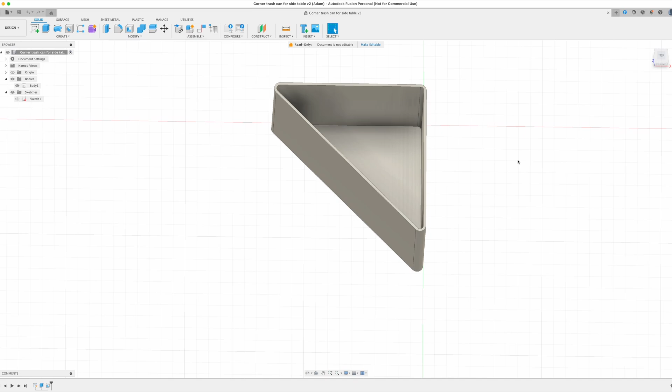Here I am in Fusion 360, and here's the design. It's just a triangle, a right triangle with rounded corners, shelled out.

Let's take a look at the sketch. Okay, so I drew a line 135, 135, connected them, and then I rounded them off with a radius of 5.

In OpenSCAD, it's going to be a little different, because as far as I know, there's not a super easy way to round it off. So I'm actually going to use cylinders.

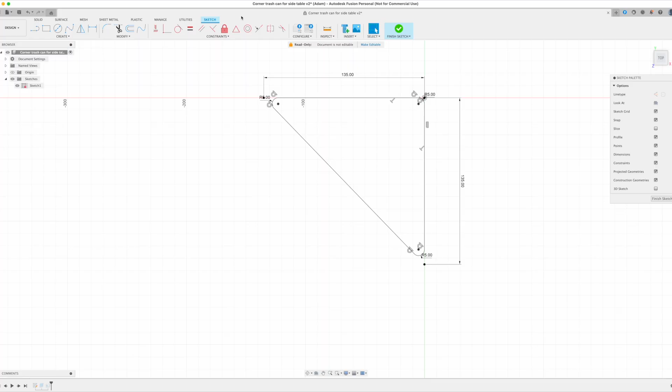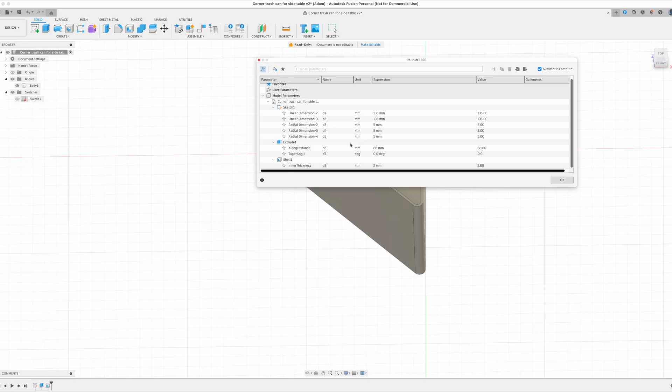Let's see, how tall did I make this thing? I can find out how tall I extruded this. I could measure it, from here to here, 88. Another way is to change parameters and look at this extrusion, AlongDistance, 88.

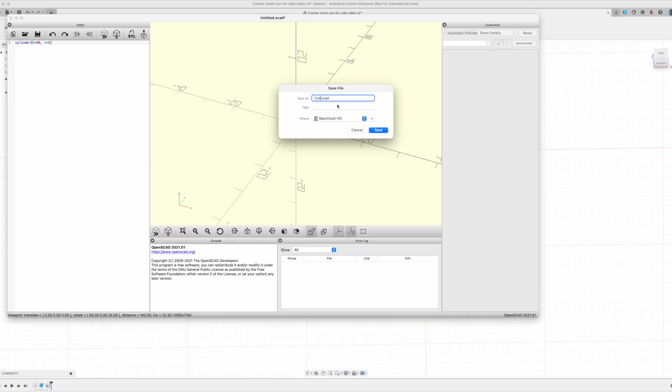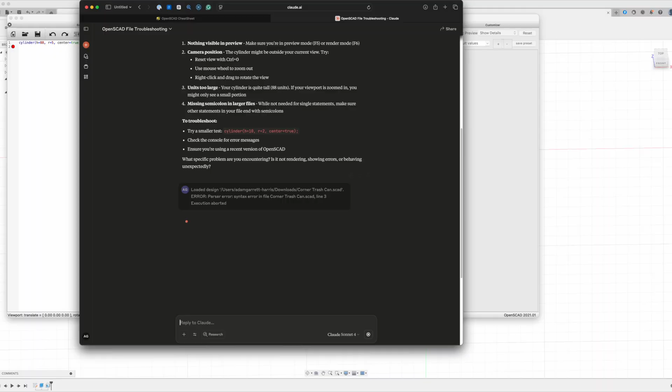So the height will be 88, and let's do H. The radius will be 5. Let's see what I did wrong here. Okay, I finally figured out - you have to have a semicolon.

Okay, so what I'm going to do is make 3 cylinders like this and translate them. This one has a radius of 5 from the center, so it's 5 over and 5 over. So go back here. First one will be 5x, 5y, 0z.

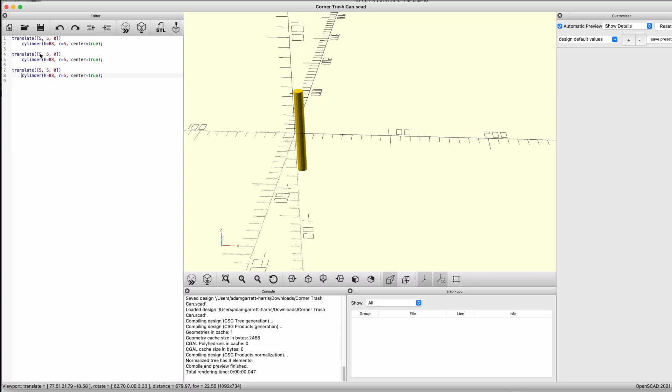The second one is 135 over minus 5, so 130. And the other one is the same thing in the other direction, so 5 and then 130.

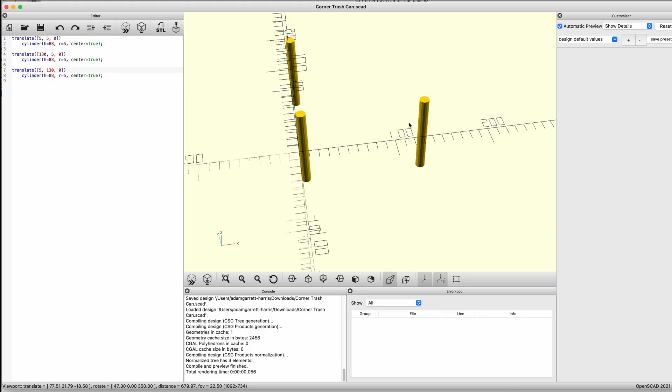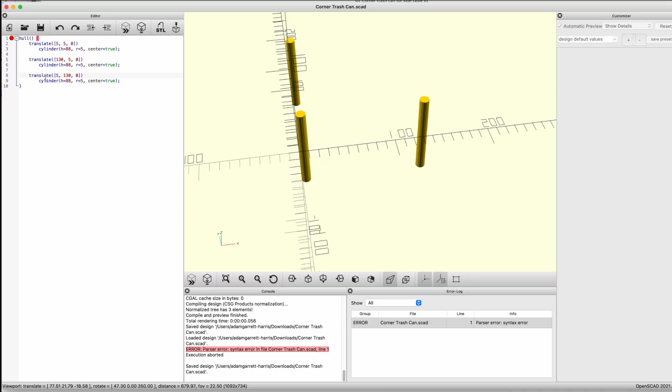So these are the rounded corners. And then if I tell it to do a hull, give it opening curly brace, closing curly brace - I think I need parentheses. There. There's the outer shell.

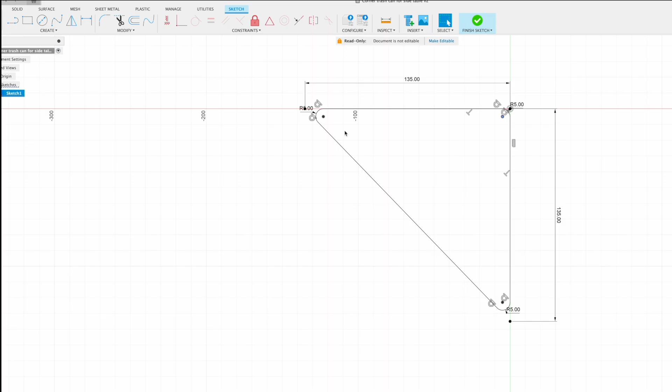Now what I need to do is this whole thing, but with a smaller radius. So let's find out what this distance is here. I can measure from there to there. Okay, that's not right. I can measure from here to here, 2 millimeters.

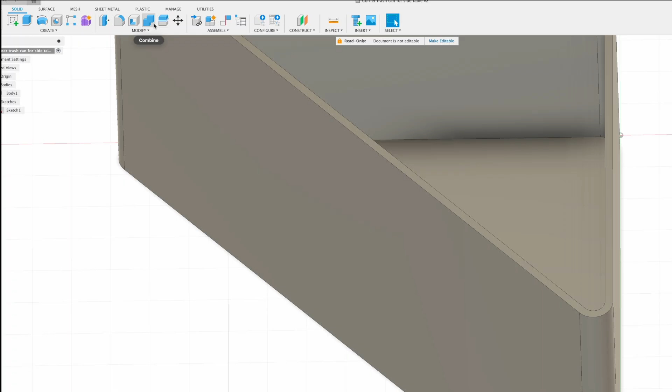And let me see if I can also check this other way - into a shell of 2 millimeters. Okay. So if I make this just 3 millimeters instead of 5, that should be 2 millimeters.

Now I won't be able to see it unless I comment this one out. I can also do something like that, or an exclamation point. Yeah.

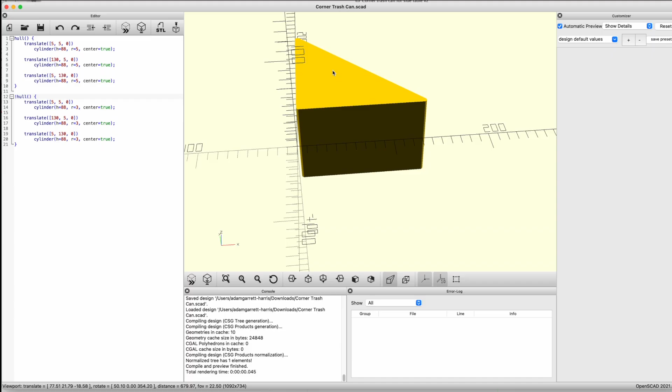So when I made that exclamation point, it looked like the whole thing got a little bit smaller, but really what happened is that it hid the other one. Or I could put a pound sign in front of the bigger one, and it makes it transparent.

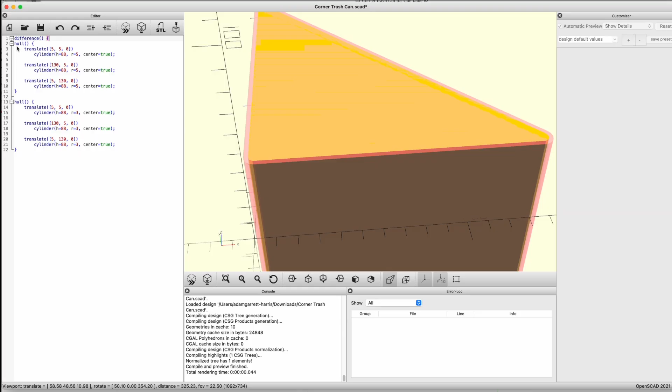So what I'm going to do with these two shapes is do a difference. Now you can see it's a little fuzzy on the bottom and the top, and that's because they are the exact same height. So I need to translate this one up.

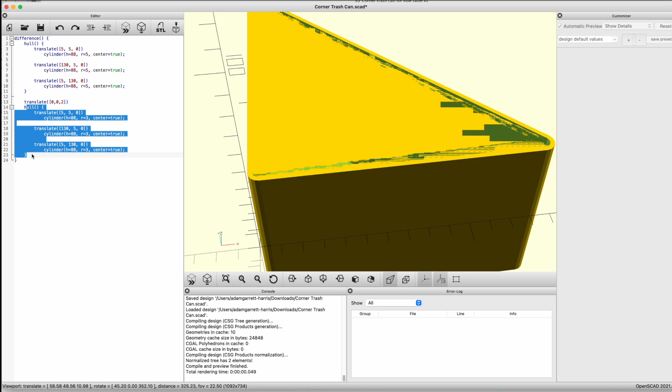I need to translate it up by 2, because that's how thick the walls and the bottom need to be. So there we go.

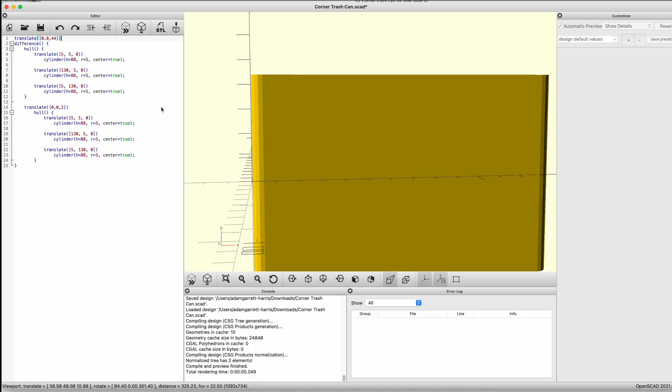And if I wanted to, I could also translate this entire thing up a little bit, if I'd like it to be on, I don't know, on the XY plane. So I could stop there.

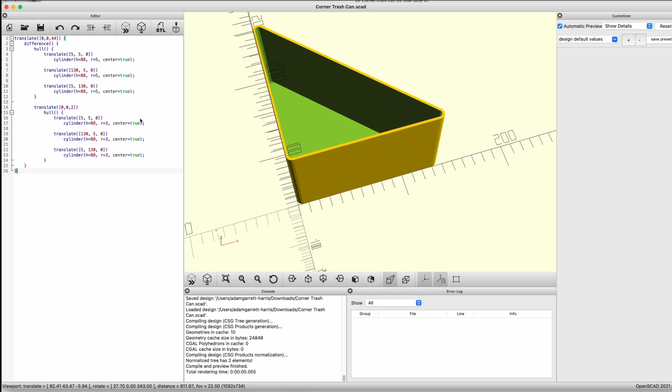Height is 88. The corner radius is 5. The wall thickness is 2. Side 1 length, that's 135. And the same thing for side 2 length.

Okay, these all need semicolons. Okay, this 44 is half of the height. So I'm just hitting save after I do each of these to make sure it's all the same. Let's go and fill in everywhere that we're using height.

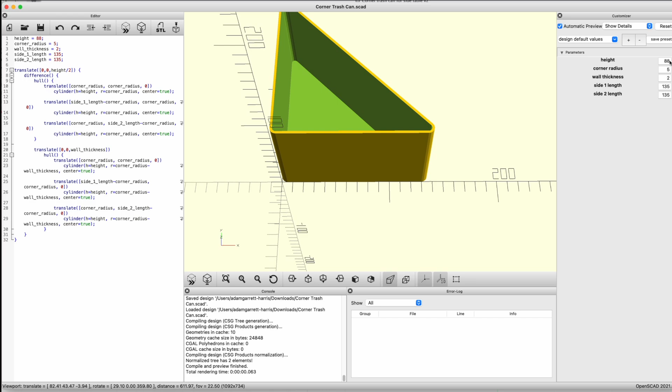Now, what did we get from that? Now over here, there's a height, corner radius, wall thickness, and so I can play around with these. Let's make it not so tall. Let's go even shorter. Cool. Wall thickness.

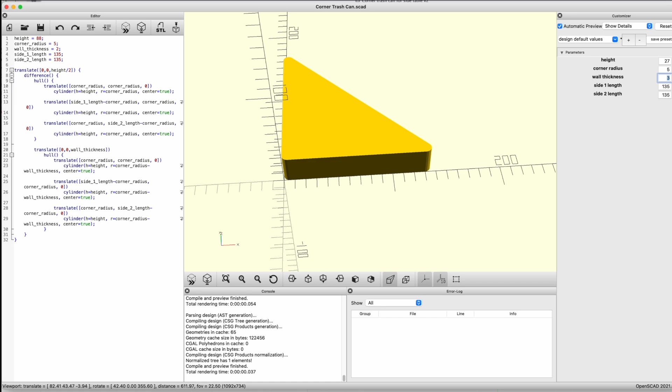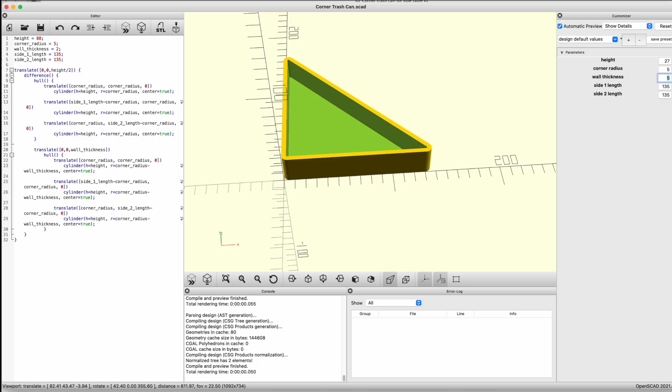That didn't work. Oh, okay, so I don't think the wall thickness can be thicker than the corner radius. So I can do 3, I can do 4, but as soon as I do 5, it goes solid.

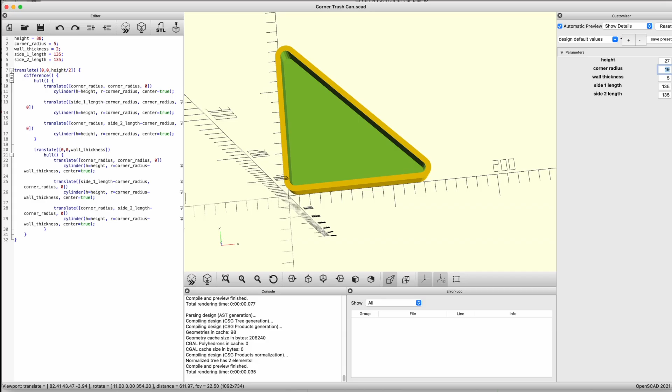But what if I change the corner radius to be 6? Yeah. 10 or 20. Wow, okay.

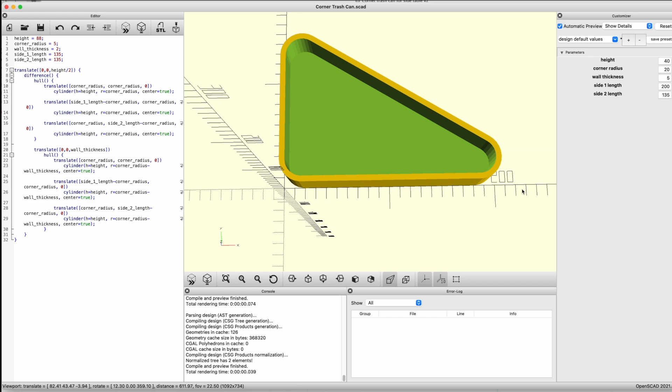And I can make one of the sides 200 and the other one 135 - whatever I want to do. So that is so cool. And then I can reset. There we go.